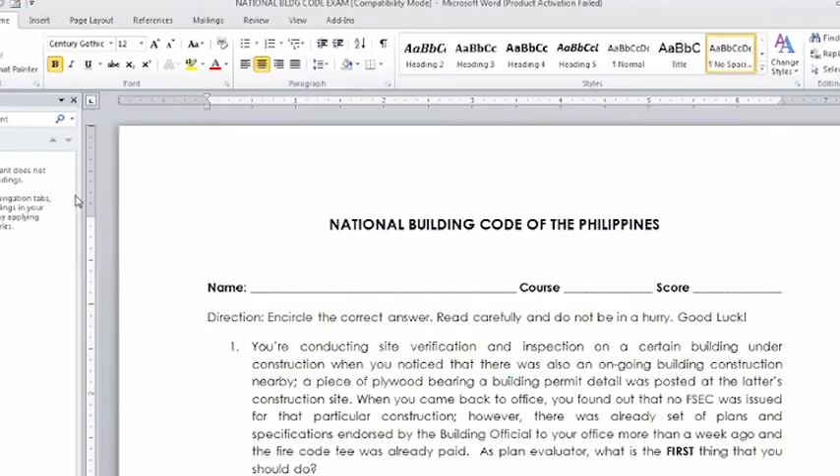Ano po ang nakikita nyo sa screen? Exam, parang Rona.

Ano po nakikita nyo sa screen? National printing code, sir. Format, parang stamp, sir. Test paper, parang exam ang format?

Okay, test question. So, before we proceed to the lecture proper, I wanted to answer this question para mag-instill ito sa utak ninyo, and later we will discuss this one by one. Now, tama ba? Parang exam type ang nababasa nyo? Ang nasa screen niyo? Okay.

So, can you please answer number 1? I will read it to you. You're conducting site verification and inspection on a certain building under construction when you notice that there was an ongoing building construction nearby; a piece of plywood bearing a building permit detail was posted on the latter's construction site. When you came back to office, you found out that no FSEC was issued for that particular construction. However, there was already a set of plans and specifications endorsed by the building official to your office more than a week ago, and the fire code was already paid. As plan evaluator, what is the first thing that you should do?

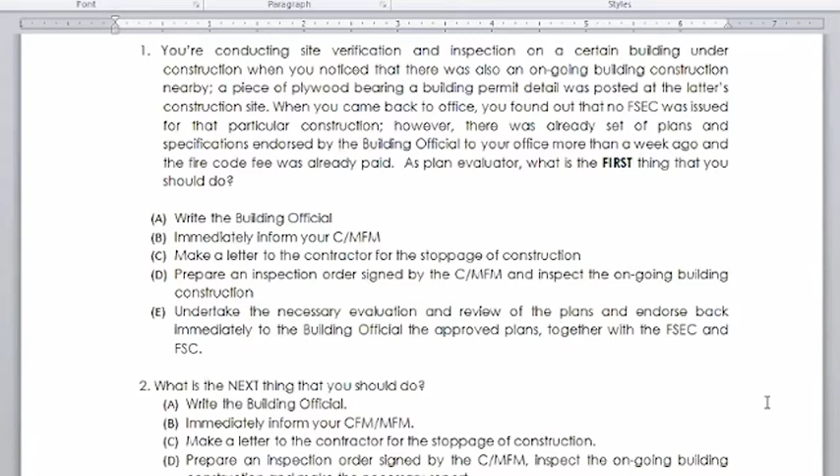What's another answer? Letter E, sir. Letter E, Echo. This is situational, ano? What's another answer? Letter B and letter D? Well, letter B, sir. Wala na ibang answer? May B, may D. Sir, letter E. Letter E, Echo. Letter C, letter E. Letter B, sir, letter D. Letter B, Bravo, letter C, Delta. We will go back, ano? Letter B, sir, letter B.

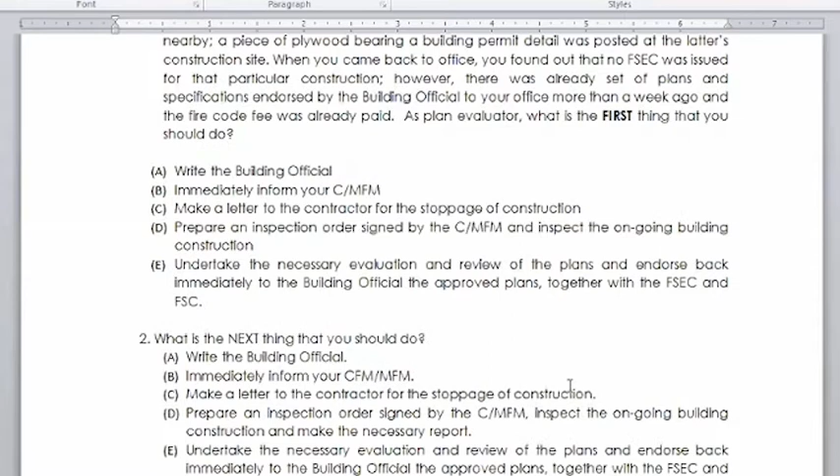Question number 2. What is the next thing that you should do? Anyway, wait. Number 2, what is the next thing that you should do? Write the building official, immediately inform your CFM, MFM, make a letter to the contractor for the stoppage of construction, letter D, and letter E. So, ano, what is your answer?

Letter D, sir. Letter D. No, Delta, Delta, sir. Kung namali kayo sa number 1, may kayo sa number 2. Letter A, sir. Letter A, Bravo, sir. Bravo. Letter A po, sir.

Okay, number 3. Number 3, sir. Letter Delta, sir. Delta.

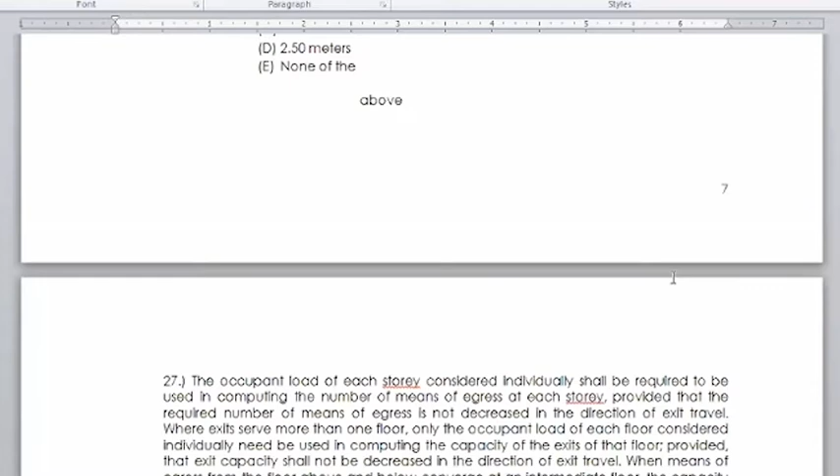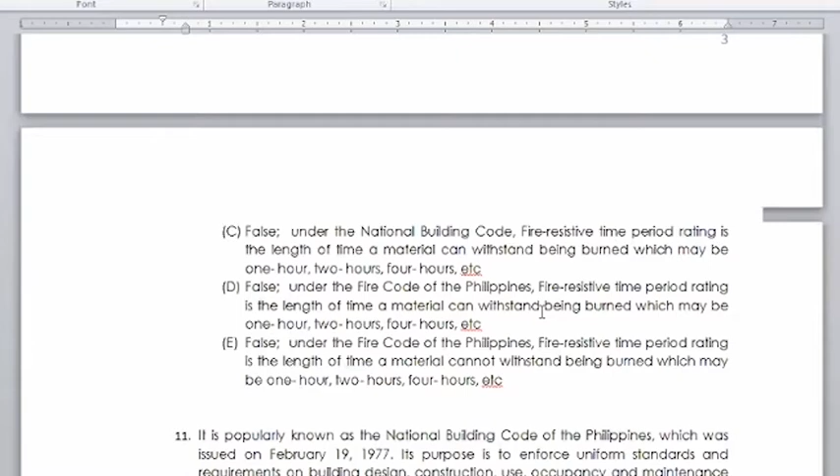The first thing that you should do is to undertake the necessary evaluation and review of the plans and endorse back immediately to the building official the approved plans together with the FSEC and FSC. Yung katong problem ka, submitted na, sir, yung plan, more than 1 week na. More than 1 week, anong ginawa niyo?

Nag-lapse na kayo ng 7 days. Dito makakain? Hindi. Pag inaction kayo, wala kayong ginawa, yung building official, pwede siya mag-issue ng building permit.

Liwanag. Meron naririnig na ibang ano. Pakimit po.

Naintindihan. So, it is important that right after the plan was endorsed to your office, immediately you take action, necessary action. You evaluate the plan. Kasi kung kalaban niyo yung building official niyo, technically, in 7 days, in a week, na hindi nila ma-actionan, pwede siya mag-issue ng building permit. Pwede siya mag-issue. I-discuss natin mamaya pagdating natin ng lecture proper.

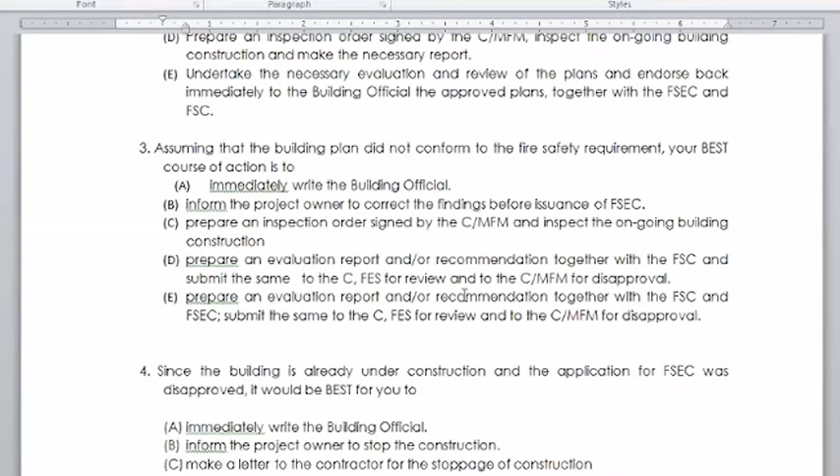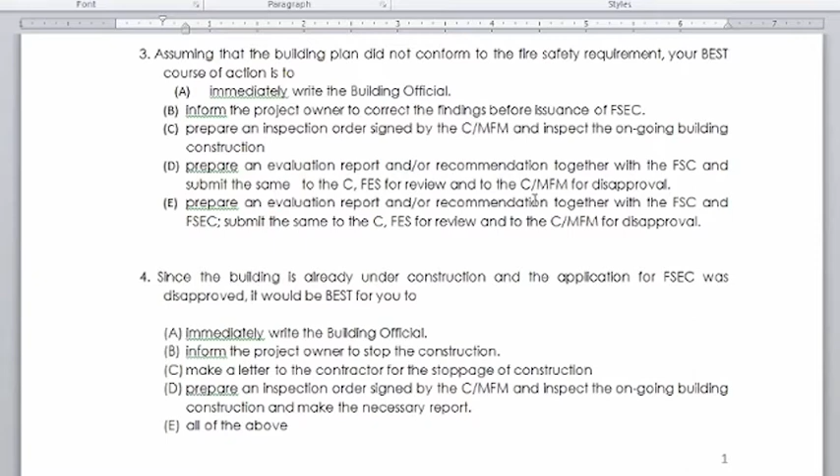Lang, parang nagkakanda wala ito. Prepare inspection order, prepare evaluation report. Dapat number 4, you have to write, letter A, you have to write the building official. Kasi kapag hindi yan nag-conform sa fire safety requirement at ongoing na yung construction, the building official that issues the building permit must be informed. Kasi kailangan niya na ipa-implement din ng building official yung requirement.

Maliwanag. Naintindihan? Yes, sir. So, ang mga gagawin nyo, pag nakikita kayong under construction, binigay na sa inyo yung plano, hindi nyo pa i-evaluate, so evaluate nyo agad yung plano.

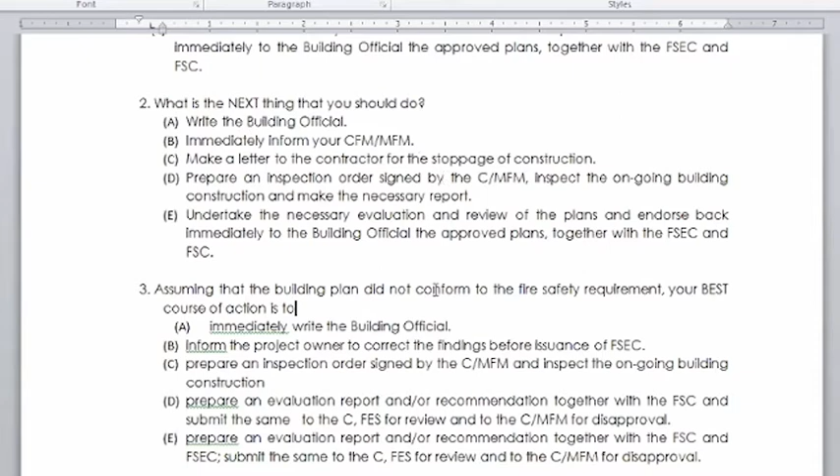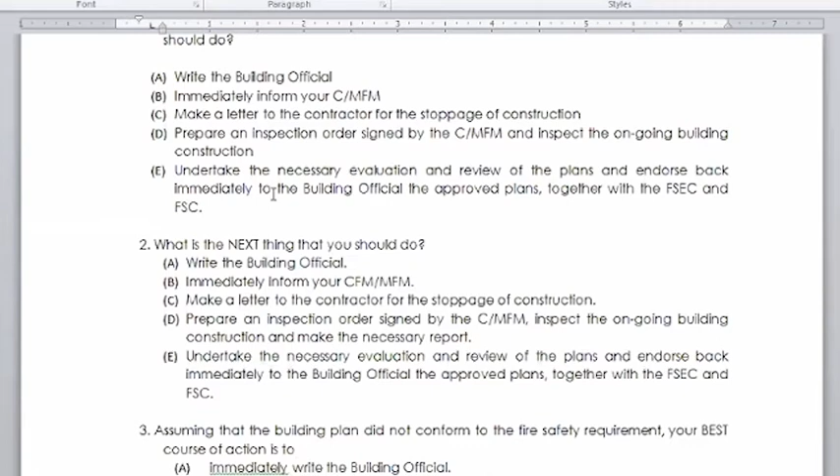Tapos, inspect nyo, gawa kayo ng inspection order, then inspect nyo, then gawa kayo ng report, assuming that the building plan, nung assuming, ito tapos na ito, itong dalawa ito, tapos na ito. Ito lang at ito yan, first, second, tapos na yan.

Mag-inspection na tayo. Now, assuming that the building plan did not conform to the fire safety requirements, the best course of action is to prepare kayo ng evaluation report and recommendation with FSEC and submit the same to the chief FES for review and for disapproval of the city municipal fire marshal. So, gagawa kayo ng notice of disapproval.

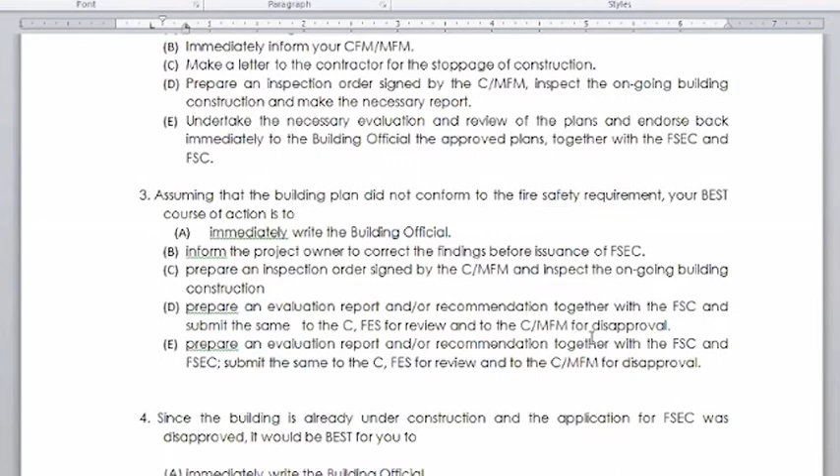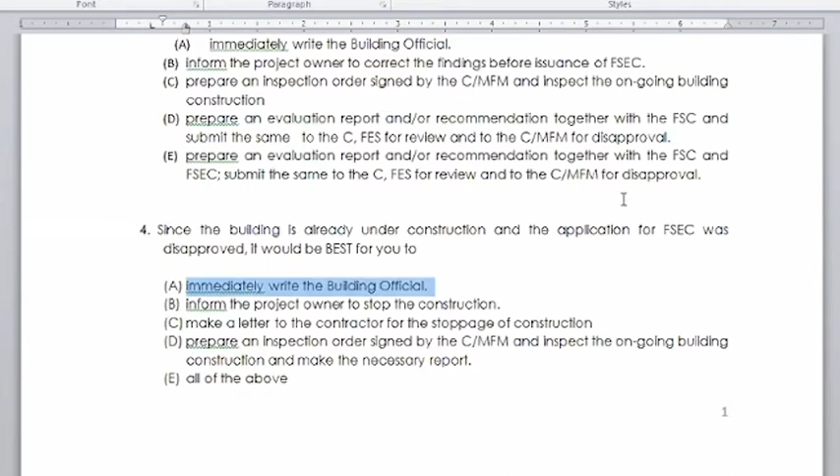Then, since may notice of disapproval kayo, so you have to inform the building official. Not only the building official. Endorse your notice of disapproval to the building official.

So, dito na tayo para masagot yung question natin kanina. So, our topic for today is the National Building Code of the Philippines, otherwise known as the Presidential Decree 1096.

Presidential Decree number 1096, popularly known as the National Building Code of the Philippines, was issued on February 19, 1977. So, tagal na, mas matanda pa ito sa akin, or mas matanda pa ito sa atin. Pero yung iba sa inyo, mas matanda dito. Its purpose is to enforce a uniform standard and requirements of building design, construction, use, equipment, and maintenance in line with the policy of the state to safeguard life, health, property, and public welfare.

Please take note of the date, kasi mamaya may significance ang mga date. The original rules and regulations of the code were issued in various stages, 1977 to 1979, through Memorandum Orders by the defunct Ministry of Public Works.

So ano na ngayon yung Ministry of Public Works Transportation and Communication ngayon? So, yung DPWH na ito, di ba, Loresto? These rules and regulations were then compiled by the then Ministry of Public Works, now the Department of Public Works and Highways. This compilation was subsequently approved as the Implementing Rules and Regulations, IRR, of the code.

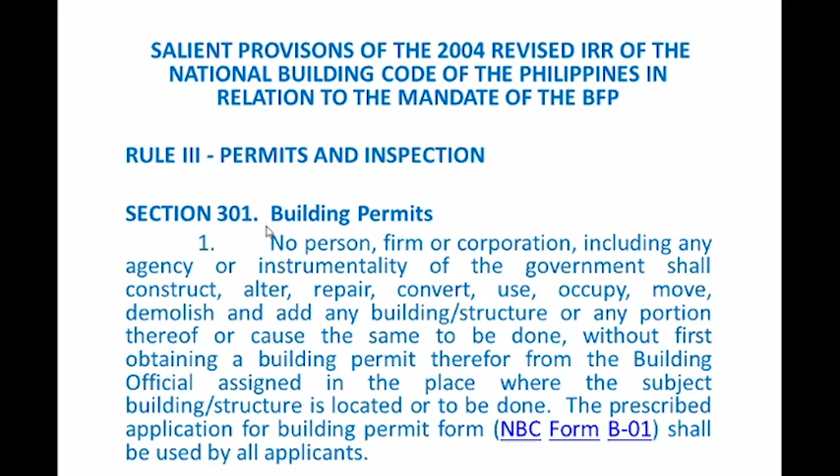Policy of building permit. A building official, prior to the issuance, shall refer one set of plans and specifications to the city municipal fire marshal for review, with respect to fire safety and control. The city municipal fire marshal shall submit its report on the same to the building official within...

5 working days from date of referral. The city municipal marshal shall submit his report and recommendation to the building official within, take note, 5 working days from date of referral. Failure of the city municipal marshal to act within the period shall mean that the plans and specifications conform to all the requirements required for the facility.

Naintindihan? Mark Anthony? Yes, sir. Sir, if you fail to act within 5 working days from date of referral, what will happen? What will happen, or what might be the consequences?

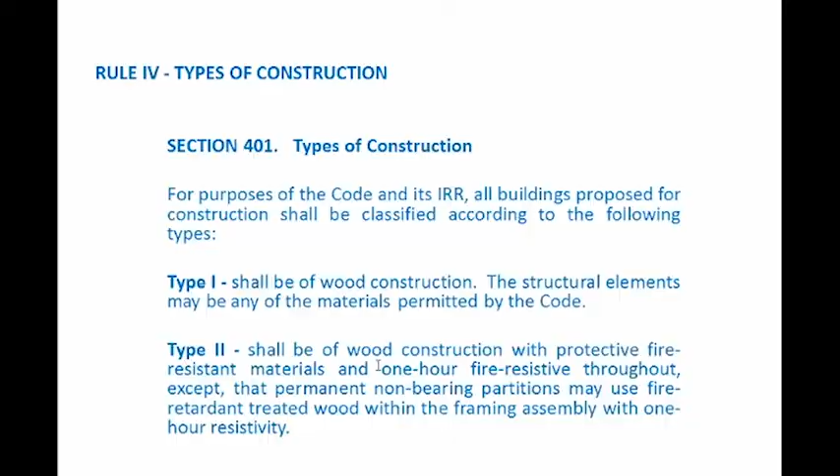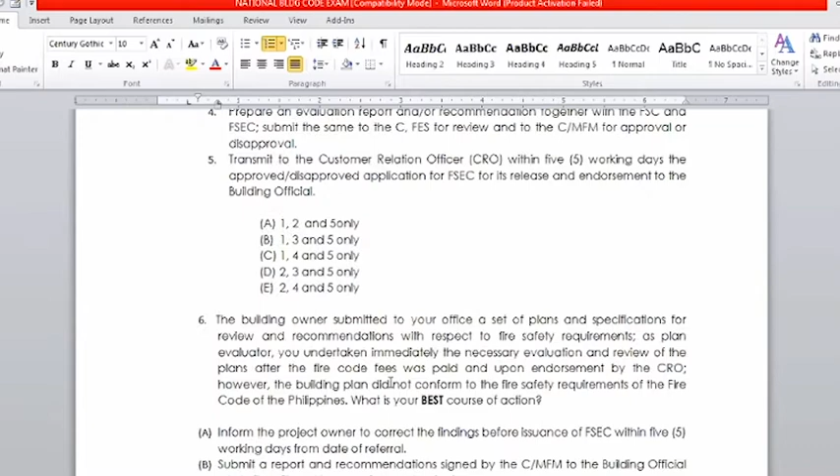So we try to answer this question. The building official referred a set of plans and specifications in your office for reviewing with respect to a particular project. After payment of fees by the owner or his duly authorized representative, the customer relations officer recorded the application and endorsed the same without delay to you. As designated plan evaluator, what are you going to do next?

The building owner submits to your office a set of plans for review and recommendation with respect to fire safety requirements.

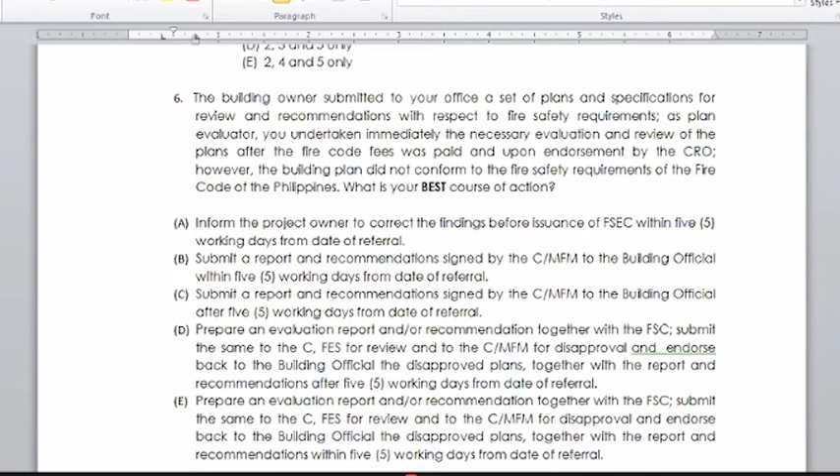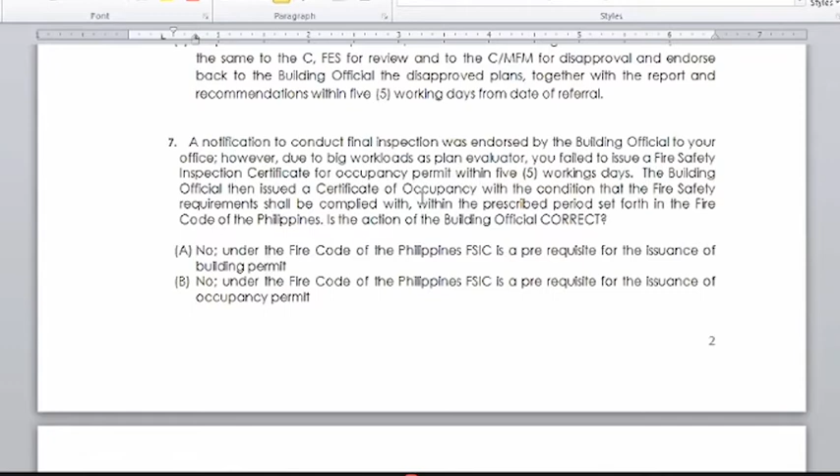Number 7. A notification to conduct final inspection was endorsed by the building official to your office. However, due to workload, the evaluator failed to issue a fire safety inspection certificate for occupancy within 5 working days. The building official then issued a certificate of occupancy with the condition that the fire safety requirements shall be complied with within the prescribed period set forth in the Fire Code of the Philippines. Is the action of the building official correct?

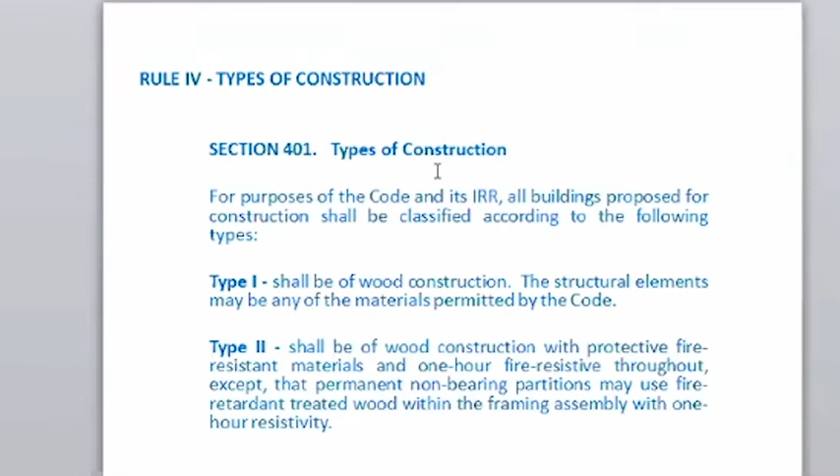Type 3, shall be of masonry and wood construction. Structural element may be any of the materials permitted by the code provided that the building shall be 1 hour fire resistive throughout. Exterior walls shall be of non-combustible fire resistive construction.

Exterior wall. Ano ibig sabihin ng exterior wall? The wall that cover or that envelope the building. Yung perimeter ng building. Palibot niya. That exterior wall. Dapat non-combustible fire resistive construction. Kung non-combustible, dapat it should be made by what? It should be masonry, hollow block, diba? So type 3, combination ng hollow block and wood.

Type 4, shall be steel, iron, concrete, or masonry construction and wall. ceiling and permanent partition shall be of incombustible fire resistive construction, except that permanent non-bearing partition of 1 hour fire resistive construction may use fire retardant treated wood within the framing assembly.

Ano pinagkaiba ng steel? Ano pinagkaiba ng iron? Ano pinagkaiba ng steel at iron? What do you mean by concrete? Roy, ano ang pagkakaiba ng steel at saka iron? Karike, research mo ba? Anybody can help Karike? Anong pinagkaiba ng steel at iron? Engineer Marinda, ang pagkakaiba ng steel at iron.

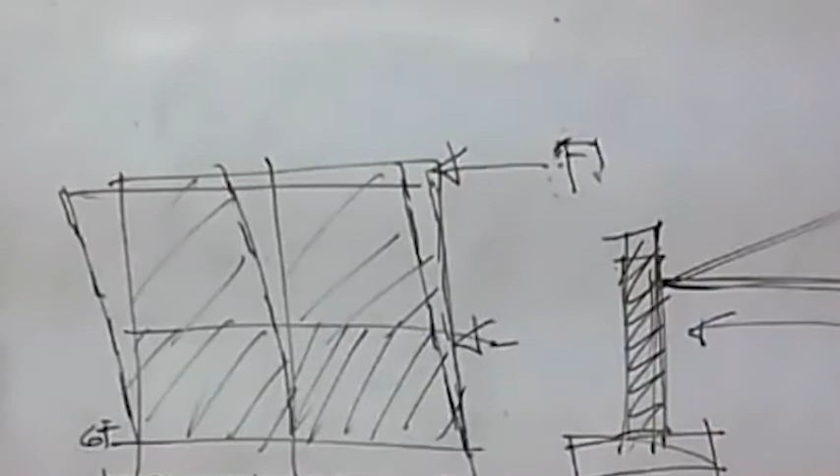Any other question? Any more questions? None.

Requirements of type of construction. Letter B, interior bearing walls, permanent partitions, floors and roofs of type 2, type 3, type 4 construction shall have 1 hour fire resistive rating. The interior bearing walls and permanent partitions, floors of type 2, type 3, type 4 shall have 1 hour fire resistance rating, while those of type 5 shall have 3 hour fire resistive rating. For the interior bearing walls and permanent partitions, including floors and roofs, type 2, type 3, and type 4 construction should have 1 hour fire resistive rating, and type 5 should have 3 hours. Understood?

Letter D, structural frames. What are structural frames? Structural frames include the columns, the beams, the slab. Type 2 and type 3 construction shall have 1 hour fire resistive rating, while type 4 shall have 2 hours rating, and type 5, 3 hours fire resistive rating. Exterior doors and windows shall have 1 hour fire resistive rating at all times.

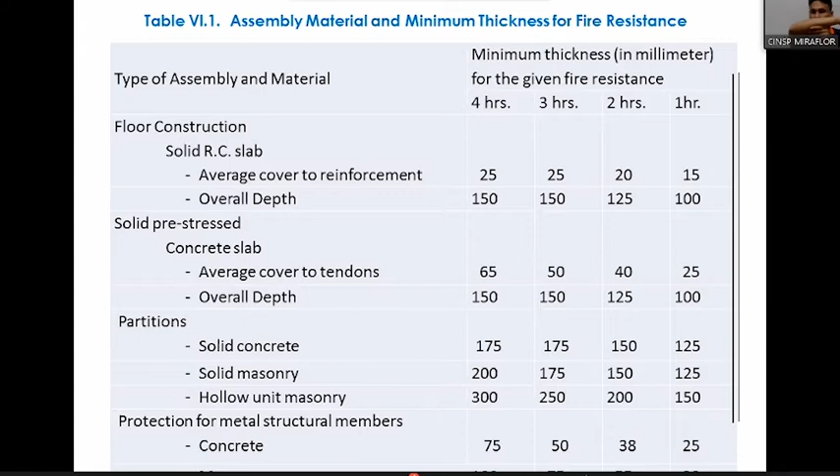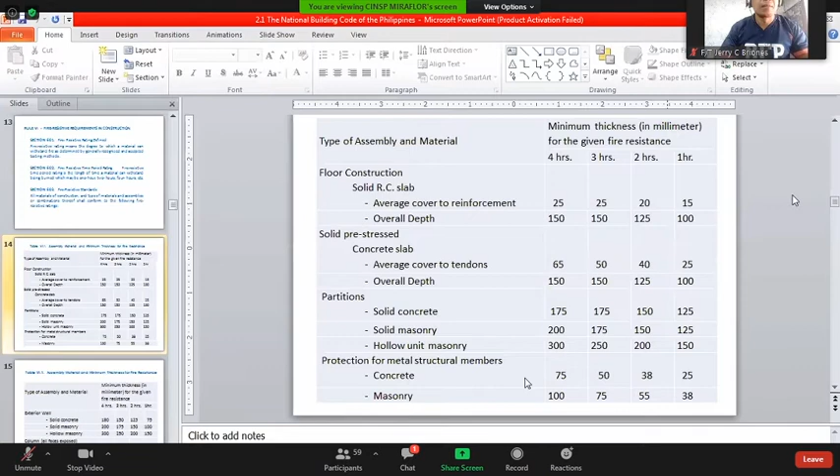Hello? Okay sir, copy sir. Copy. Tapos na tayo sa pre-stress, ano?

Anyway, very technical ang mga words na yan, mga engineers na lang nakakaintindi. Yung tendons, na-explain ko na sa inyo kanina. Then partition, solid concrete, solid masonry, hollow unit masonry.

So ano yung solid concrete? Usually ginagamit natin dyan ay solid reinforced concrete. Kasi kung solid concrete lang siya, wala siyang reinforcement, so ang tendency niya, walang humahawak sa konkreto. Kaya ang tendency ng konkreto ay mag-break easily dahil ang concrete ay wala o mababa ang tensile characteristic.

Anong ibig sabihin ng tensile characteristic? Tensile strength. Ibig sabihin, yung material na hindi agad-agad nag-break. Nag-yield muna siya, ibig sabihin nag-deflect muna siya bago siya mag-break.

Ang solid concrete, kung concrete lang talaga yan, pag in-applyan mo ng pressure sa taas o sa side, pag umabot siya ng sabihin natin 3,000 PSI, magka-crack na yan. But if you put reinforcement...

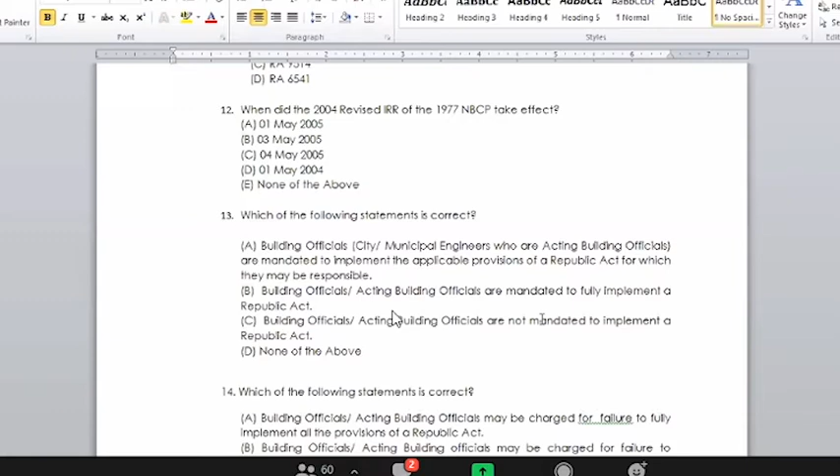Okay, so what do you think is your best answer to your client? Letter C, sir. Letter C.

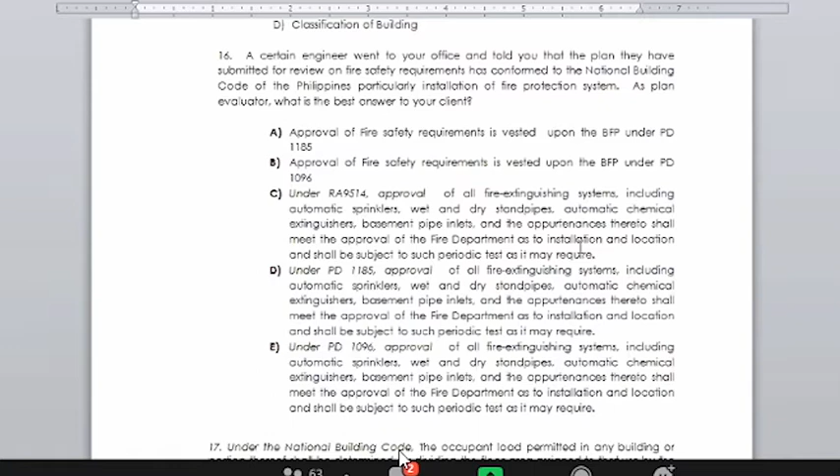What do you think, Yanda? Sorry, sir.

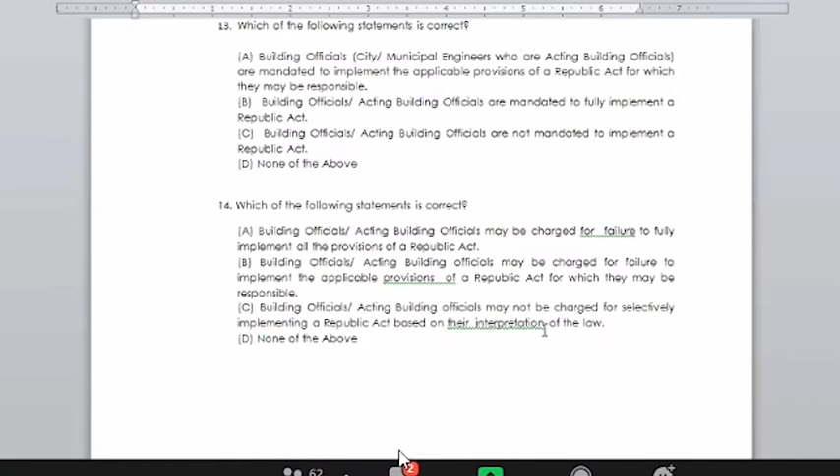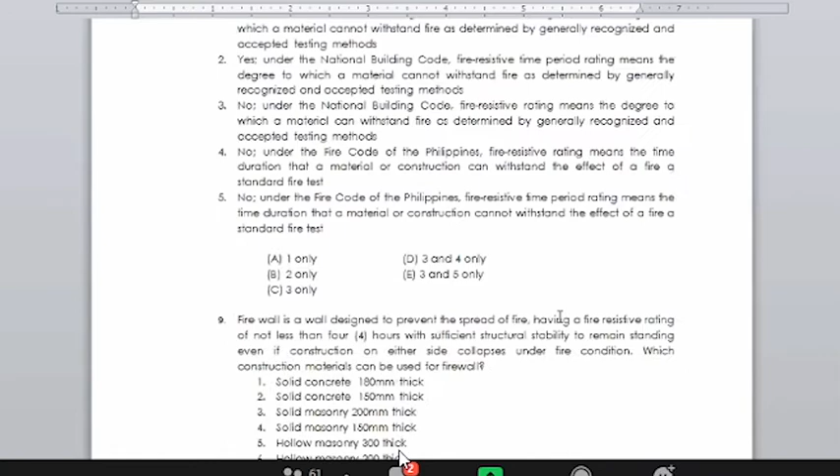What do you think is the best answer to your client? So, anong sasagot niyo sa client niyo, Marenda?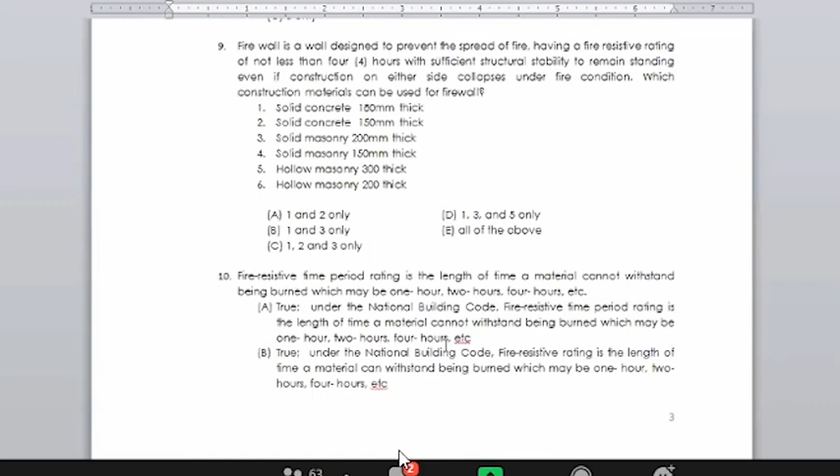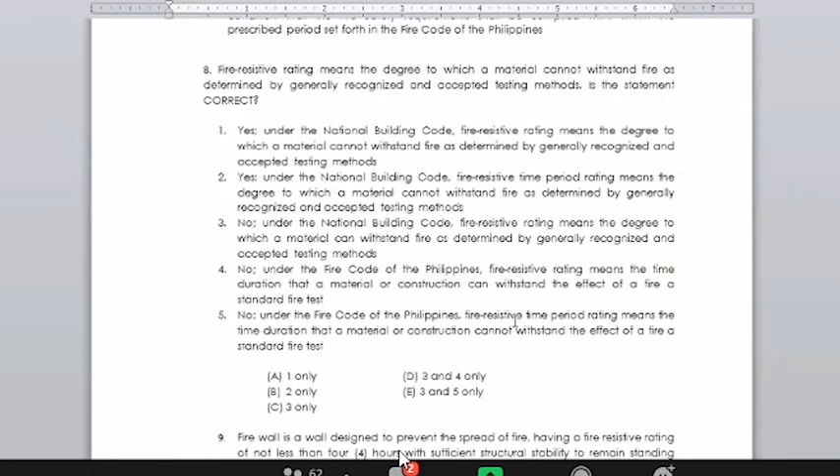They must comply sir sa fire code natin sir, because mas deep yung fire code natin sir na lumabas. Makakomply sila sir sa fire code. Fire code, why? Mas stringent yung fire code, then mas late na siya lumabas sir.

Sir. According to the law, sir, the Fire Code of the Philippines is more binding than the PD 1096 or the building code, sir. Come again. Sir, according to the law, sir...

Anyway, check number 12, when did the 2004 IRR of the 1977 NBC take effect? 2005, sir. May 1, 2005.

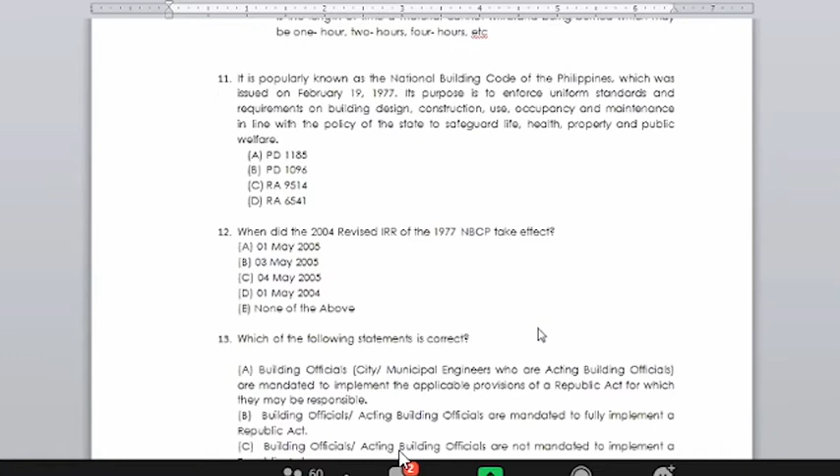So when did the latest or the revised IRR of the fire code take effect? October 2019, sir. Basically, because of the repealing clause, any laws or codes inconsistent doon sa latest code, yung latest code ang nag-aapply. Naintindihan ko. Sabi natin yung repealing clause ng fire code.

Anyway, let's continue sa ano natin. Screen. Go back to our lecture. So, we start sa partition, right?

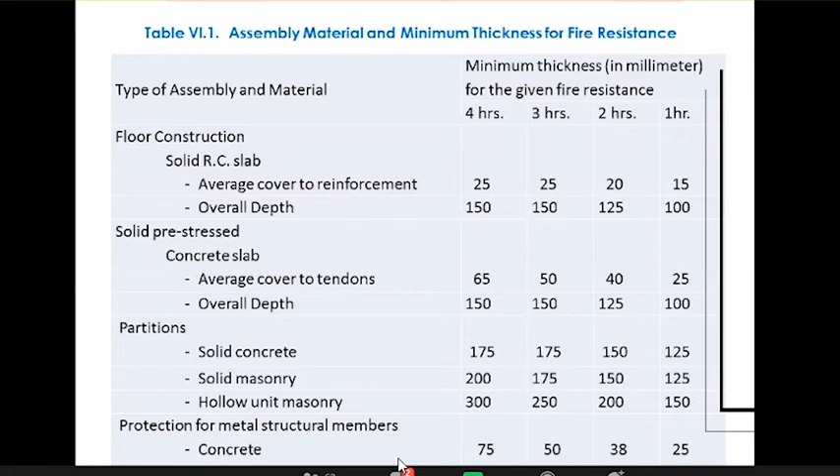So plus, my question is, ang firewall - kasi firewall is considered as an exterior wall, sabihin natin. Sa firewall, what do you think is the best material to use? And gaano siya kakapal sa firewall? Carlos, sa firewall, Carlos Navales.

Sir. Sa firewall, sir, mga 4 inches, sir. 4 inches na? Ano, sir, yung kapal, sir, ng pader, yung firewall, sir.

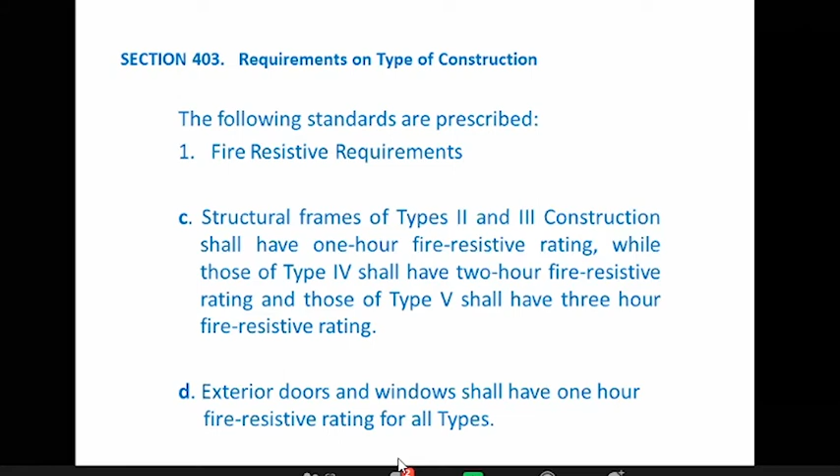So, going back here, if you will use reinforced concrete, yung minimum size of column dapat na gamitin natin ay ano? Alan? Sir. Anong size ang pinaka-minimum na column dapat? 300, sir. Requirement? 300 millimeters, sir.

Yes, sir. Okay. Kasi for frame, ang requirements ay 2 hours rating, for type 4 and type 5. For 2 hours, ang gamitin natin, minimum ay 300. Kung gumamit ako ng 400, is that okay? Yes, sir. Kung ang minimum na 4 hours, 3 hours yan, mas better. Understood? So I hope na nakuha na ninyo ang significance ng type of material, type 1, 2, 3, 4, and 5, and ang relation noon dito sa dinidiscuss natin na fire rating.

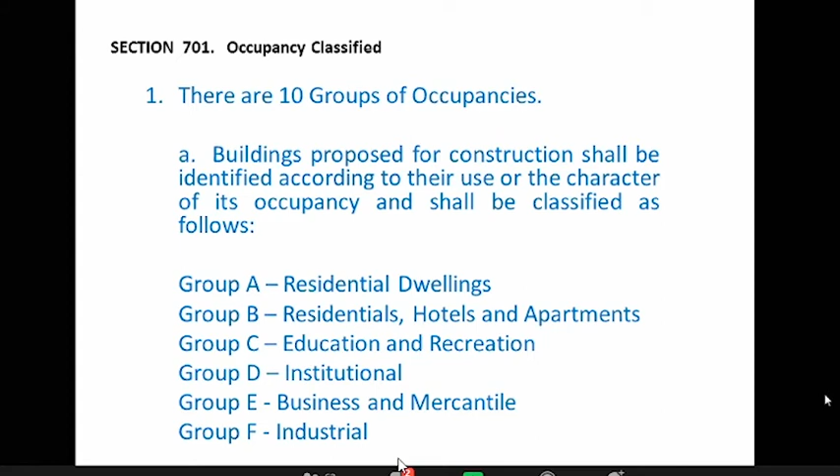Assembly occupant load more than 1,000, Group I. Group J, accessory.

Agricultural structure, division 2: private garage, carport, fence, or tank, pool, tower. Division 3: stage, platform, indoor tennis, badminton, or basketball court.

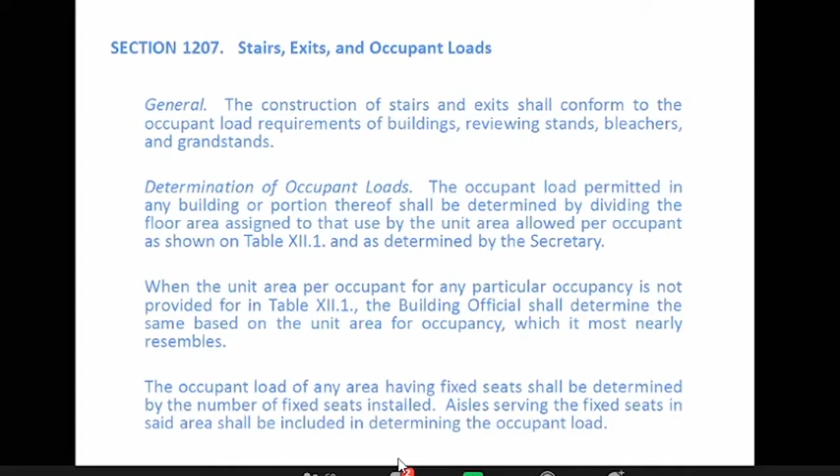The occupant load of the building or portion of a building place shall be that specified in table 12.1. Explain na lang ito if necessary seats are provided. And in determining the occupant load, all portions of the building shall be presumed to be occupied at the same time. Exception: accessory areas, which ordinarily are only used by persons who occupy the main area.

Areas of occupancy shall be provided with seats as though they were completely occupied. However, in computing the maximum allowable occupant load for a floor or building, the occupant load of the accessory area can be disregarded. Yung mga accessory areas na ito, may idea, accessory area?

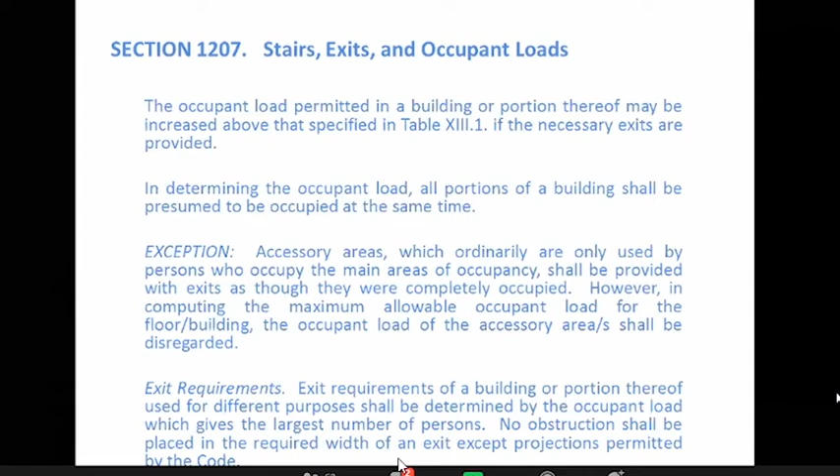yung healthcare, diba? Mas mataas, 11 point something. So, all others, 7.6 and 5. I hope naalala nyo.

Exit requirement will be determined based on use for different purposes, determined by the occupant with the largest number of persons, or no obstruction. Posting of room capacity: any room having an occupant load of more than 50, not restricted or stored, which is used for classroom, assembly, or similar purpose, must have the capacity of the room posted near the main exit from the room.

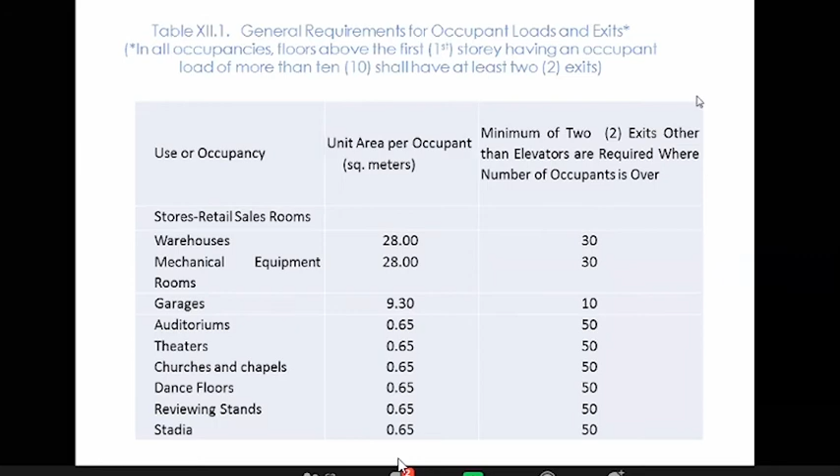This auditorium theater, church chapel - this is concentrated occupancy. Theirs is 0.65. How much is ours? The same, sir - 0.65 as well.

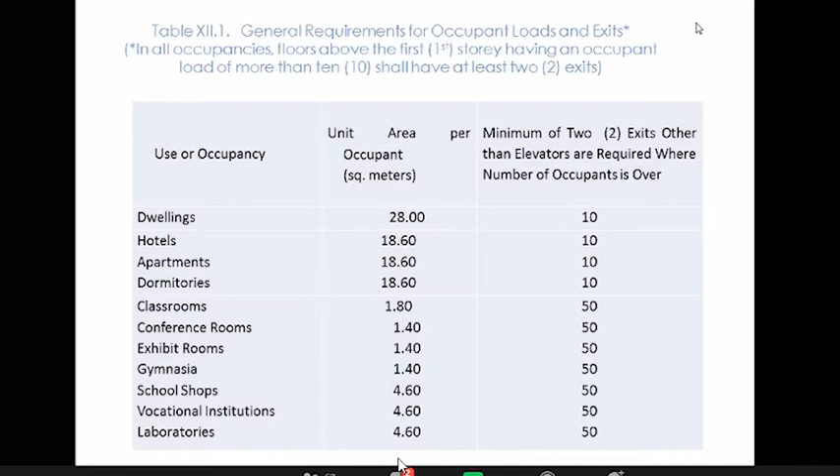Sa fire code, ito diba? Minimum of 2 exits each floor and story. For occupant load, 501 to 1,000, minimum 3 exits, for 1,001 and above, four exits. Ito yung occupant load factor niya.

Assembly, 0.65, concentrated, less concentrated, 1.4, standing room, waiting space. Standing room, imagine 0.28 square meter. Ilan na ang 0.28 square meter? Ilan ang dimension niyan? Ngayon na natin.

Standing room, 0.28. So, standing room pala, mga 0.53 ang dimension per tao. Kaya naman, or 0.28 square meter kada tao.

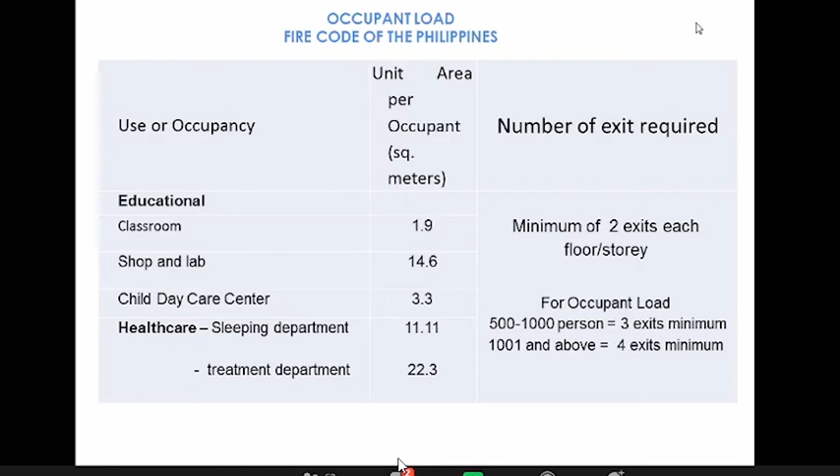So, educational, yan. Sa shop and lab, meron pala tayo educational din, for child day care. Child day care, yan, dito tayo po. Compare lang po natin

Storage naman, maximum probable population. Storage kasi, kung napakalaki ng storage area, napakalaki. Pero in a normal course of operation, napakatunti lang naman ang pagkakalagyan. Napakatunti.

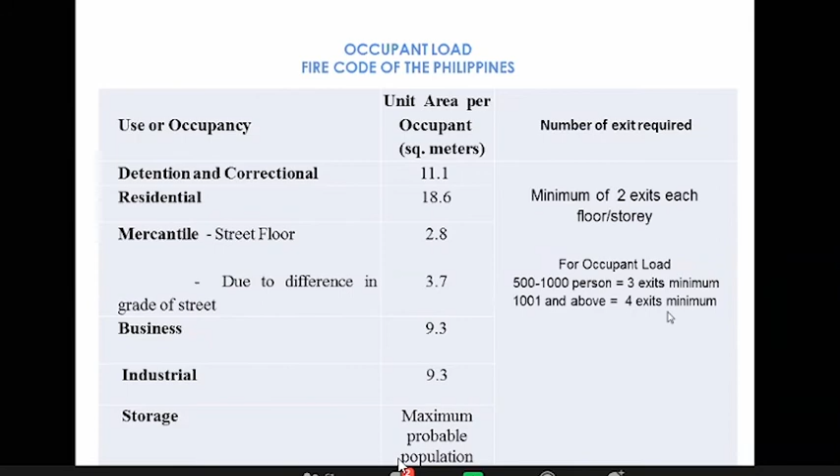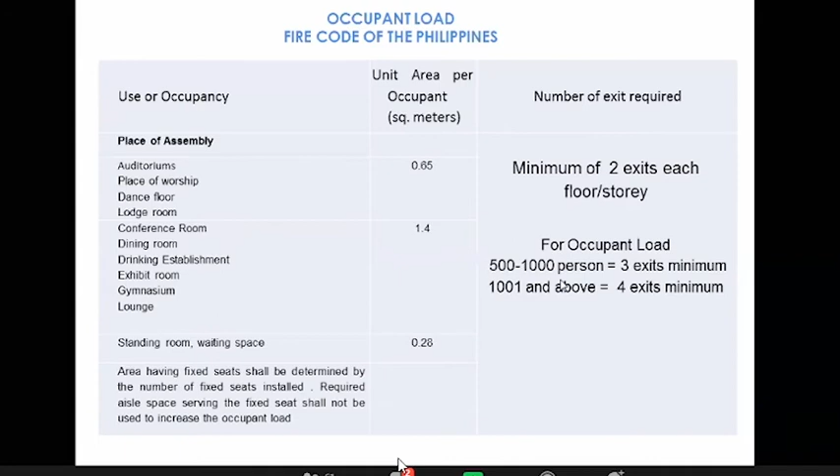Ano ba natin? Ito, for occupant load, 500. Actually dito pala, yes, 500 to 1,000. 500 in below, dalawa. 500 to 1,000, tatlo. And then, 1,001 in above, apat. Unlike sa building code, 500 to 999 lang. Ano, tatlong exits, 1,000 na ba? Apat.

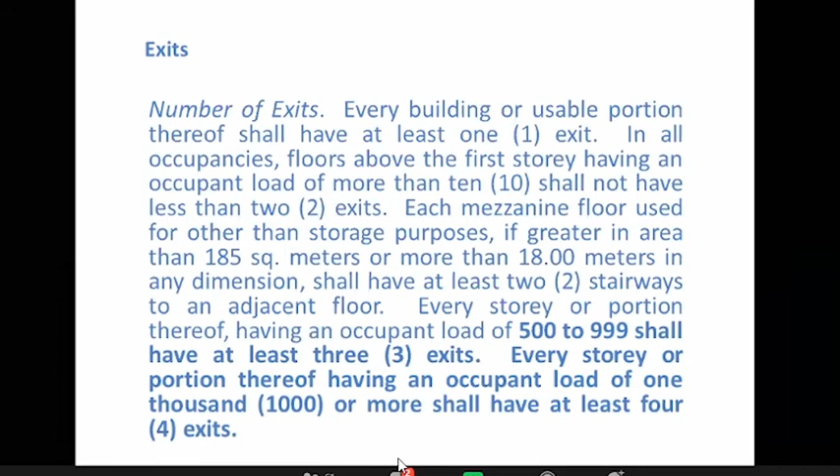The number of exits required for a story of a building can be determined by using the occupancy of floors which exit to the level under consideration as follows: 50% of the occupancy in the first adjacent story above and the first adjacent story below, when the story below exits to the level under consideration, and 25% of the occupancy in the story beyond the first adjacent story.

Hindi dahil dito. Actually, kaya ko sana itong... wait lang, baka. Wait lang.

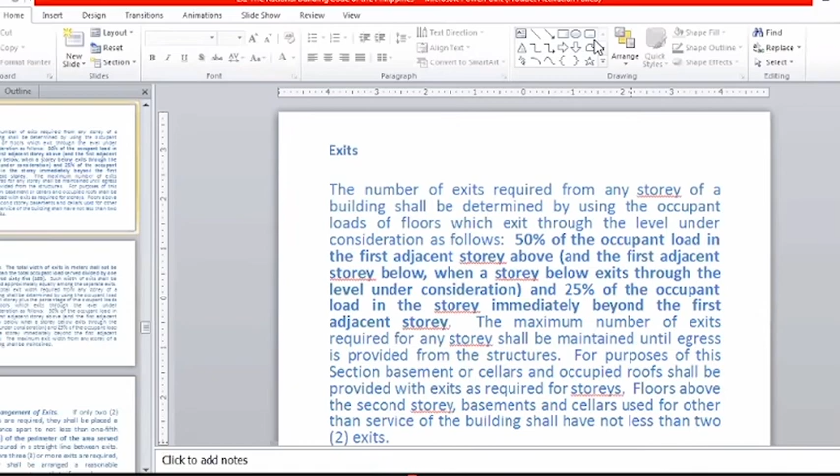Okay, sabi nyo, para hindi ma-problema, ulitin ko. Sa fire code, to determine the number of exits, kailangan lang natin i-determine yung occupant load per floor. Pero sa building code, sa ground floor, if you have to compute for the number of exits, you need to consider 50% of the second floor and 25% of the third floor.

Paano kung may basement? Basement is a story adjacent to the floor of consideration. Halimbawa, yung ground floor, you have to add 50% from the basement, 50% from the second floor, and 25% from the third floor.

If that's the case, marami ng tawag dito - lumaki na yung occupant load under consideration sa ground floor. So that's yung requirement ng building code. Sa tingin ko mas effective ito, kasi siyempre yung tao sa second floor ay bababa, sa third floor ay bababa rin.

Paano kung may emergency? The tendency na magkasabay sila ng mga occupant load ng ground floor, second and third floor is really possible, as well as yung sa basement. Kaya dapat yung sa ground floor mas malaki.

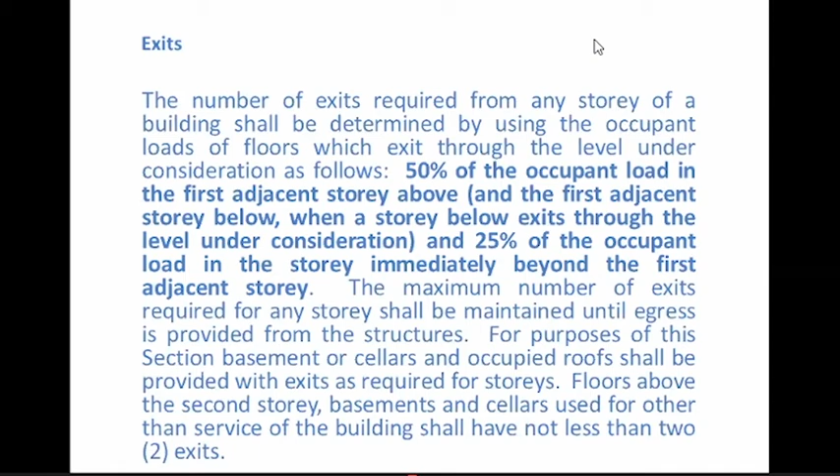Width: the total width of exit in meters shall not be less than the total occupant load served divided by 165. Such width of exit shall be divided approximately equally among the separate exits. The total exit width required from any story of a building shall be determined using the occupant load of that story plus the percentage of the occupant loads of floors which exits through the level under consideration: 50% of the occupant load in the first adjacent story above and the first adjacent story below the level under consideration.

The maximum exit width from any story of a building shall be: the total width of exit in meters shall not be less than the total occupant load served divided by 165. Tingnan natin.

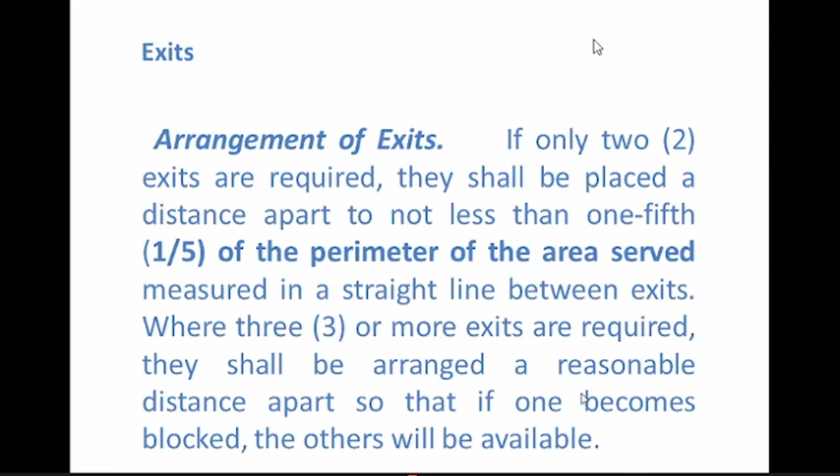Naintindihan po? IB, naintindihan mo IB? Batteries na? Naintindihan? Distance. No point in a building without sprinkler system shall be more than 45 from the exterior exit door in horizontal exit passageway or an enclosed stair measured along the line of travel. In a building equipped with a complete automatic fire extinguishing system, the distance will be 60 meters.

So ano masasabi nyo? Some other division ng fire code applicable to that, diba? Applicable, except if applicable sa saan? Sa daycare, sa healthcare, ano? Pero sa iba, business, mercantile, halos parehas.

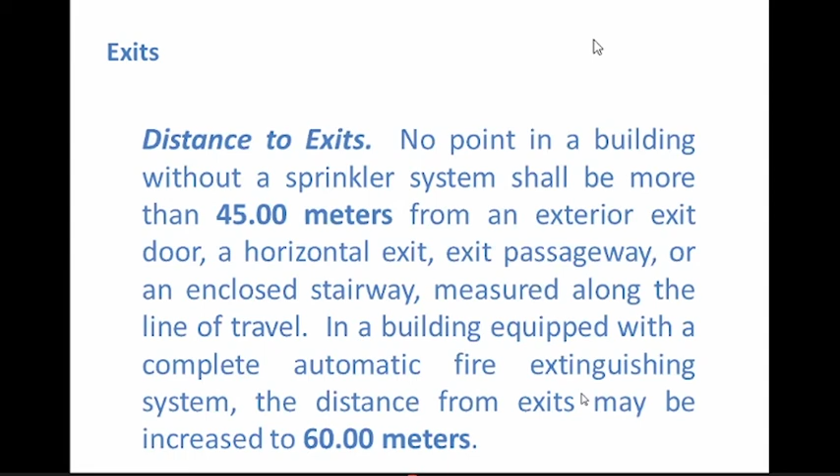Doors. Under the building code, the provision herein shall apply to every street door serving an area saving an occupant load of more than 10, or serving a standard room or area. Swing: the street door shall swing in the direction of the street when serving a standard area or when serving an occupant load. Parehas ng fire code. Double acting door shall not be used as a street door serving a tributary area, tributary occupant load of more than 100. Double acting door nor shall be used as part of a fire assembly, nor equipped with panic or flush bolt.

Double acting door, it can swing inside and outside, di ba? Double acting door, hindi pwede. Bakit? Yung papasok at papalabas, maaari silang magkasalubong. Kaya may provision sa building code, kahit pala sa atin, at sa fire code. Kung ang occupant load ko ay more than 100, bawal yan, no?

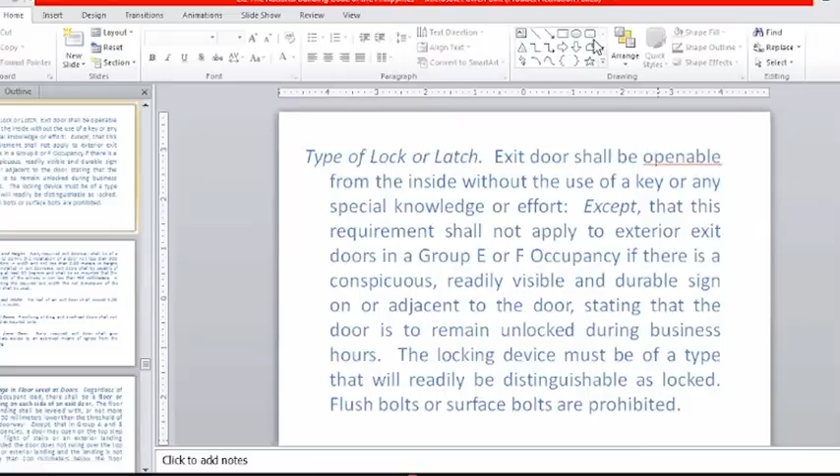Type of lock or latch, exit door, gagaya ng sa fire code ngayon. Shall be openable from inside without the use of a key or special knowledge or effort, except that this requirement shall not apply to exterior exit doors in group E and F occupancy if there is a conspicuous, readily visible, and durable sign on or adjacent to the door stating that the door is to remain unlocked during business hours. The locking device must be of a type that will readily be distinguishable as locked, flush bolts, or surface bolts are prohibited.

Na-discuss na natin sa fire code. Width and height. So dito, ang headroom niya ay ilan? 2 meters in height.

Every required exit door shall be of a size as to permit the installation of a door not less than 900 mm in width. 90 sa kanila, 90.

And 2 meters in height. When installed in exit doorway, exit door shall be capable of opening at least 90 degrees and shall be so mounted that the clear width of the exit is not less than 700 mm. So, computing the required exit width, the net dimension of the exit shall be used. The width of any exit door shall not exceed 1.2 meters in width.

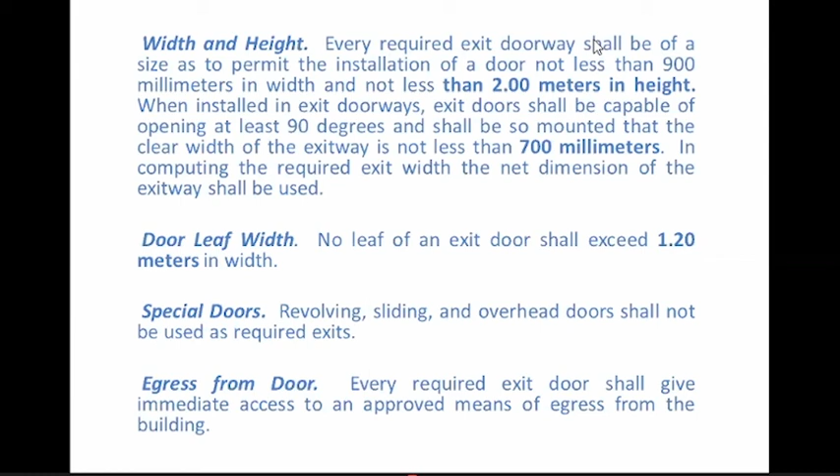Change in floor level at doors. So regardless of the occupant load, there shall be a floor or landing on each side of an exit door. Parehas din sa fire code, the floor or landing shall be leveled with and not more than 50 mm lower than the threshold of the doorway, except that in group A and B occupancies - residential, hotel, apartment - a door may open on the top step of a flight of stairs or an exterior landing provided.

Continue. Yung wara-wara sa signal. Corridors.

Corridors and exit balconies. The provisions herein shall apply to every corridor or exit balcony serving the required exit of an occupant load of more than 10. So, sa width naman ng corridor, 1.1 ang minimum sa kanila. Sa atin, 915. 915.

So, dead end limits nila, projection - pasahin na lang ito, hindi naman ito masyadong importante sa atin. So, sa dead end limits, parehas 6 meters. And ceilings of corridors shall not be less than 1 hour fire resistant.

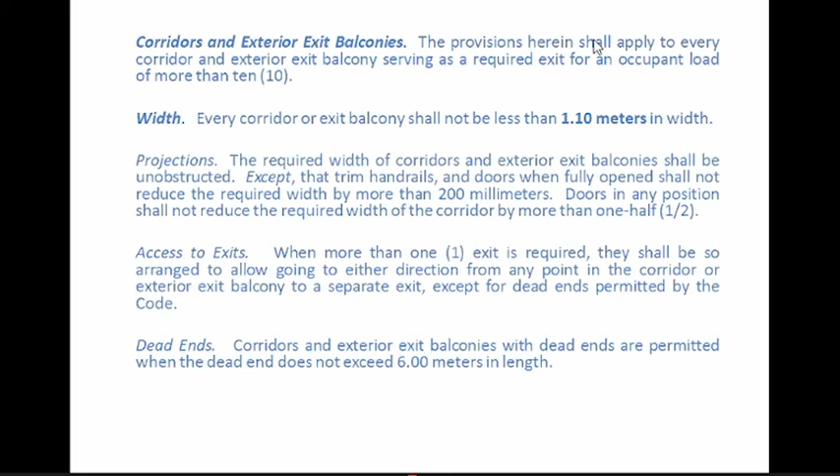Required to be... wala, sorry, agad na makapigti yung bangko signal. Anyway, let's continue para matapos na.

Width of stairway: pag more than 50 persons, not less than 1.1. Pag less than 50 persons, 900 mm wide. Halos hindi naman nakakalayo sa fire code.

Yung sa riser and run naman, not less than 250. Yung riser naman nila, 200 mm. The rise of every step in a stairway shall not exceed 200.

Yung run naman or the tread is 250. Sa atin, ilan? Sa fire code is 180 ang riser and ang tread ay ilan? 280. 280. Sa building code, ang riser niya ay 200, ang tread niya ay 250.

Winding stairs in group A, and in private stairs in group B occupancies, winders may be used. Anong winders? Edison, anong winders? Winding stair. In group A daw, pwede. And in private - anong winder, Edison?

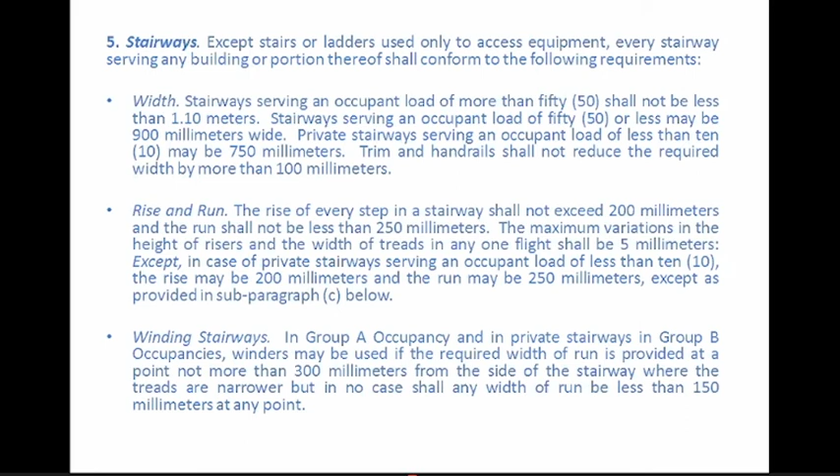The ramp conforming to the provisions of the code may be used as an exit. The length and the width of the ramp shall be as required for corridors. Outlets, courts, passageway - hindi na masyado itong importante.

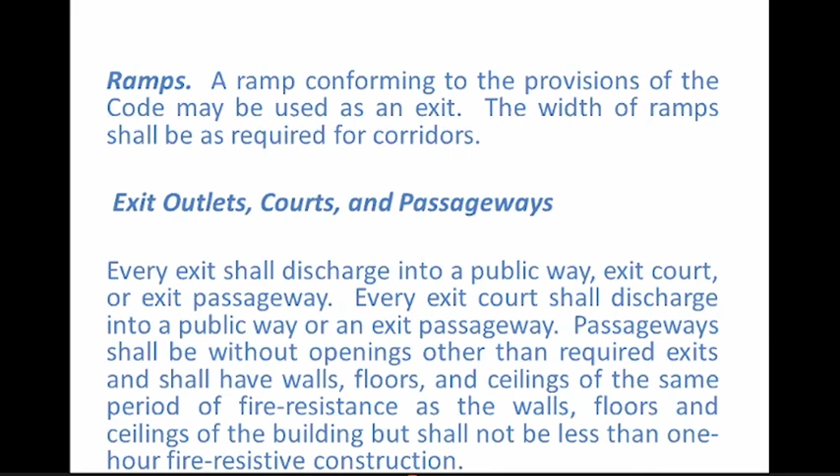Aisles. So, yung sa aisles, bigay ko na lang ito sa inyo, patayin nyo na lang. But there's no need for you to memorize all of this, kasi hindi ko naman yan ibibigay sa exam. And hindi naman natin actually kailangan, because our reference is the fire code.

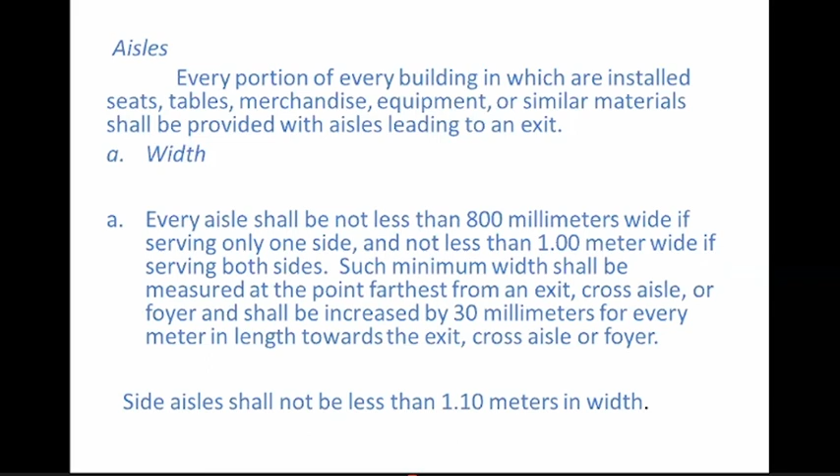Sige, ano na ano po. I-okay mo lang pinto ko dyan. Mahina daw yung wifi namin ngayon. Siguro dahil nag-burn out sa Albay. Yung GCTV, kanina.

So, ano tayo? Seat spacing.

With continental seating, the spacing of rows of unoccupied seats shall be provided with a clear measurement horizontally as follows: 450 millimeters clear for rows of 18 seats or less, 500 millimeter clear for rows of 35 seats or less, 525 millimeter clear for rows of 45 seats or less, 550 millimeter clear for rows of 46 seats or more.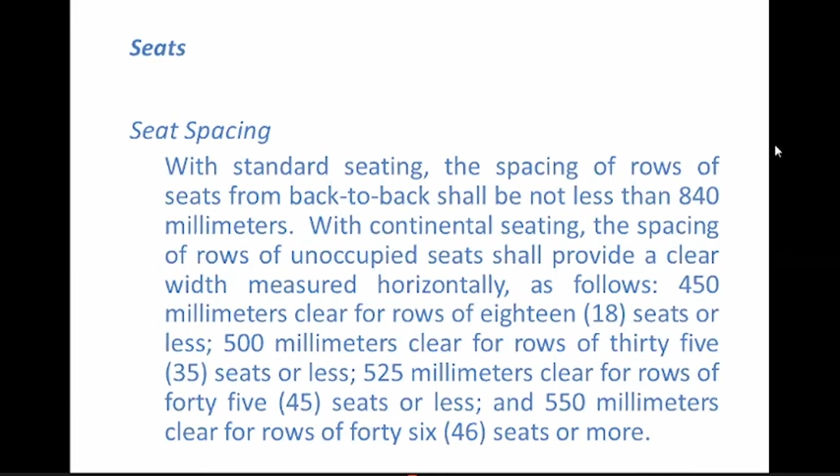Ano ibig sabihin nito? With continental seating, the spacing of rows of unoccupied seats shall provide at least a clear width. Yung sa harapan, yung kino-complete natin sa fire code, harapan yun, ito ang ibig sabihin niya. Pag ang rows mo ay 18 seats, dapat minimum 450. Pag ang rows mo naman mga 35 seats, dapat 500 ang nasa harapan. Pag 45 seats ang capacity mo, ang harapan mo, ang dadaanan mo dyan, clear back ng harap at saka upuan mo ay 525. Then 550 naman ang minimum kung ang rows mo ay 46 or more ang capacity.

Bilisin na natin. Sabi ko nga, sa building code, fire extinguishing system is also a requirement.

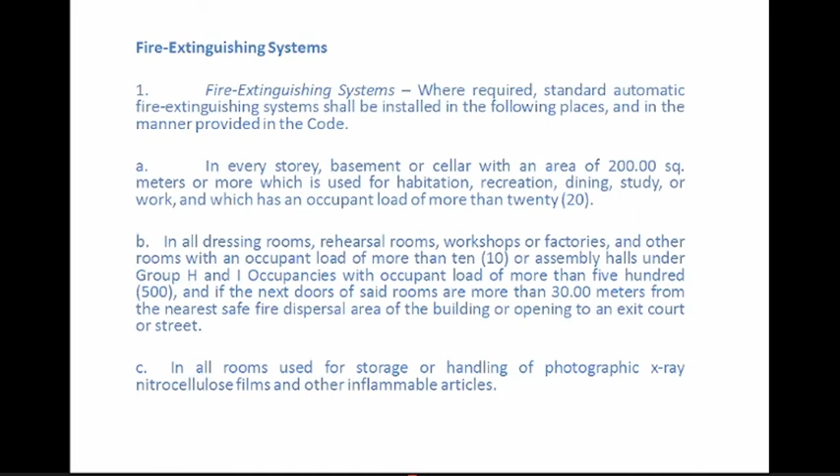Fire extinguishing system is also a requirement. But since we are the authority, BFP ang authority in terms ng pag-require ng fire extinguishing system, tayo ang masusunod. Hindi yung building code. May dry standpipe, may wet standpipe.

Although it is required under the building code, as I said, we are the authority. So tayo pa rin ang masusunod, yung requirements pa rin ng BFP.